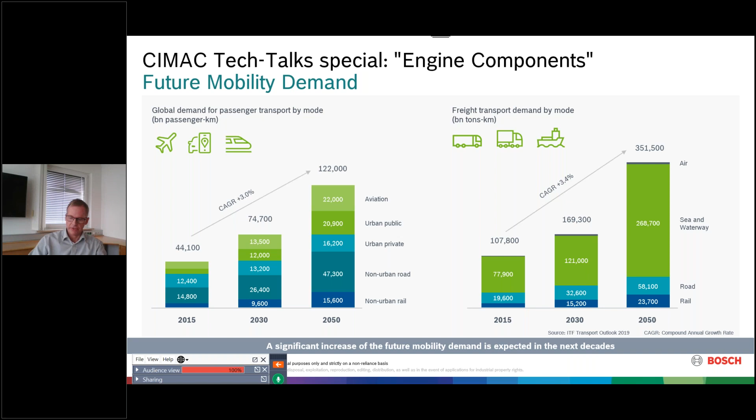Coming now a little bit deeper into the large engine segment, it is in principle separated into 4 subsegments: we have the gensets, the maritime, the locomotives or railways, and mining. On the left side you see in this diagram today's situation, and on the right side the future situation as predicted. The diagram gives an overview about the fuel supply on the y-axis. It could be via a network, via local storage, or via onboard storage if it's a mobile application. And on the x-axis you see the mileage or utilization versus time.

These are important parameters at the end to conclude on the fuel. I will come to that a little bit later.

On the left side, the current situation in blue is that we have the ICE, mainly fired with diesel or derivatives of diesel, and also already natural gas. When it comes to the future on the right side, there is a certain change in the technology, marked in green, new fuels. These fuels are characterized by either an improved ratio between carbon and hydrogen, or even being carbon free, which is the case for NH3 or hydrogen. It could also be standard fuels but from another source, like biofuel, which reduces CO2 already initially, or even e-fuels.

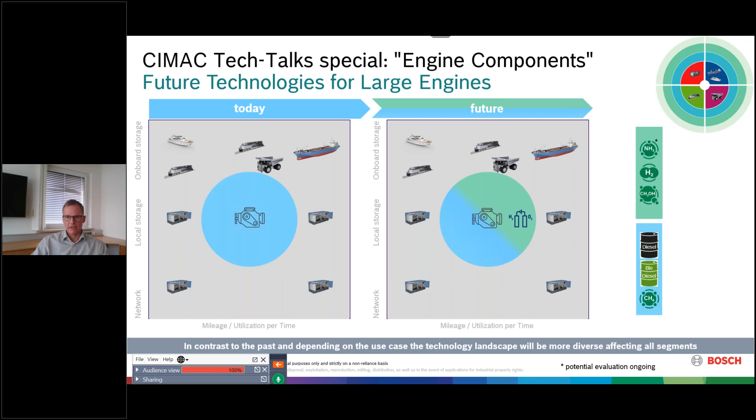So that's in principle the situation when it comes from today towards the future in the large engine segment. And there might be also one or the other application with a fuel cell.

What does this mean for the future landscape of the fuel? As an example, but I think valid also for other subsegments, we are talking about maritime. You see on the right side the sailing pattern versus the sailing distance for several types of ships. That's exactly the topic when it comes to deciding what kind of fuel, from this diversity, will be the right one in the future.

It is not that easy, because the parameters important to decide this include the use case. For example, for ships at sea, there's a huge variation, covering more or less all patterns that are thinkable. This means it's not easy, and I will come to this a little bit later, to decide what kind of fuel is the right one.

Currently, we are talking about diesel fuel mainly, and that's it. But this kind of single solution is no longer possible in the future, and it makes things a little bit challenging. So how does it work towards the future?

You see it on the left side in this column diagram. It shows from 2020 towards 2050 how the fuel types will be developing. 2020 means currently all fuels are derivatives from diesel. By 2030, in this scenario, about 20% are new fuel types, which is e-ammonia, LNG, and certain advanced biofuels. A decade later, in 2040, more than 50% is with the new fuels.

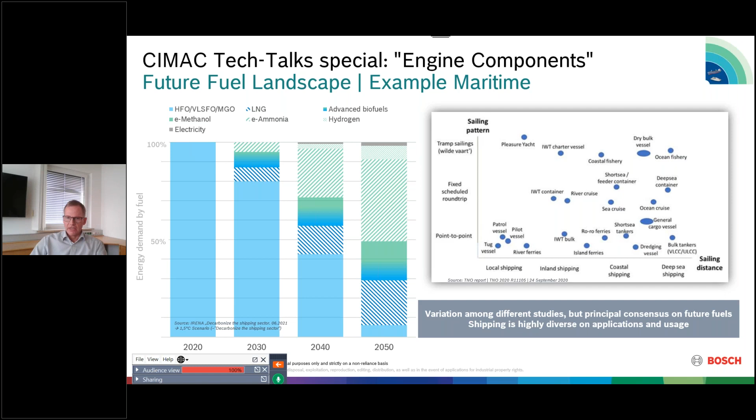This is due to further growth of the aforementioned fuels, as well as supplementation by hydrogen, e-ammonia, and even electricity. In 2050, most of the fuels are already these new alternate fuels, which have less contribution to CO2, and only a very small amount remains diesel.

So what does this mean for the decarbonization path for maritime? The right side shows on the bottom the situation as it is today: we have the ICE with diesel. There is a quick win already with biodiesel and methane, or mostly LNG. Then the next step will be the ICE with new fuels, meaning potentially ammonia, hydrogen, and also methanol.

There might also be one or the other application already with a fuel cell. There are certain limits from today's point of view for fuel cells, especially in the large engine range. One is for the PEM, for example, that there are certain requirements for cleanliness, and the other is that the dynamic response for the SOFC fuel cell is not what is needed in all applications, so there are certain limitations.

But based on this scenario, you see already that it will come, and in principle there are a lot of scenarios available, and the tendency is quite comparable.

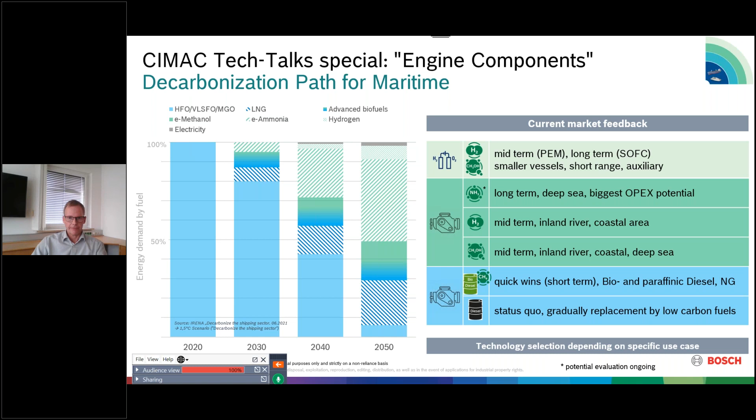So the future is towards the new alternative fuels, but still with the ICE. Coming to the combustion system, you see again in blue on the bottom today's situation. We have the diesel, we have already natural gas. This means we have diffusive combustion, and we have premix combustion.

And when it comes now to these new fuels, what you see here in green, there is a huge variation. It could be liquefied, it could be gas, and this kind of fuels you can burn either premixed or partly also under high pressure. So with that we have then for the PFI pressure levels for the injection system less than 10 bar.

For direct low pressure injection, we are talking about pressure levels which are below 100 bar. And when it comes to the liquefied high pressure injection, we are talking currently about less than 600 bar. So on the right side there is in a qualitative manner shown in principle what is the engineering content and the efforts versus the experience and maturity level.

So it's quite understandable that the current fuels, diesel, natural gas, which is quite comparable to methane, is on the upper right side, which means it is already well known, very high experience, and the optimization is in principle in focus. There's no base work.

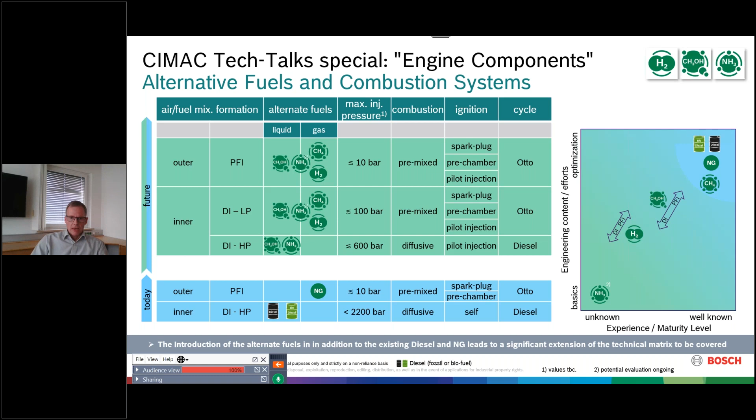But when it comes to the new fuels, we have to do a lot of investigation work on the combustion system, so that we have at the end really defined requirements as we have the situation currently for the diesel engine. This means that for the first samples, the injector is directly in contact with the combustion, and in principle it's one of the important components beside the whole combustion system, the air system, and also the combustion chamber geometry.

It plays under this kind of boundary condition to come here to a conclusion what kind of requirements we have for the new fuels. That we need here on the one side a robust solution already at the very beginning, that we have in principle the possibility to have a very good testing condition and reproducibility. And from the functionality point of view, it should also be the situation that these kind of injector samples have the potential to investigate all the parameters which are important, from the pressure, of course, also to the injection pattern.

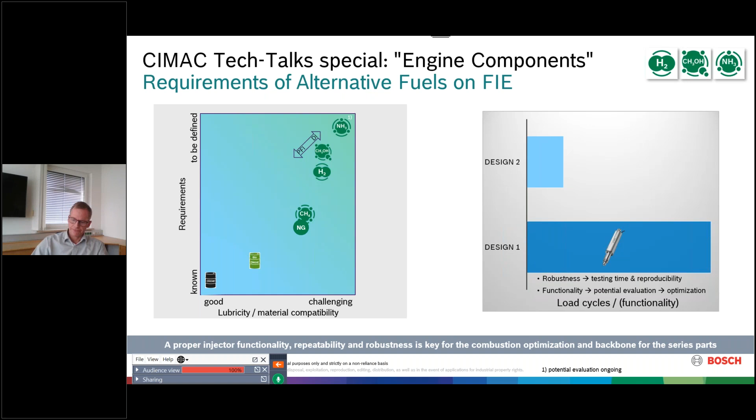Coming now to the injection system itself, we currently support all kinds of fuels: ammonia, which could be gaseous or liquid; methanol, which is liquid; hydrogen, which is gaseous; and methane, which is gaseous. As I explained before, we can use premixed combustion with port fuel injection, or direct injection, either low pressure or reaching up to high pressure injection for liquefied fuels.

From the product point of view, in our portfolio for port fuel injection of gaseous fuel we already have the large engine gas valve, which is series ready and starting production for natural gas. We are currently qualifying it for new fuels, either hydrogen or ammonia.

For the next step, direct injection at a low pressure level—less than 100 bar, as I showed before—we have our new injector, the AFI LP, the alternative fuel injector low pressure. This is a modular design able to inject liquefied fuel like methanol, but also hydrogen, a gaseous fuel, and it's also foreseen to inject NH3, ammonia, either liquefied or gaseous. That's one of the important components for the future, and I'll show more details in a few minutes.

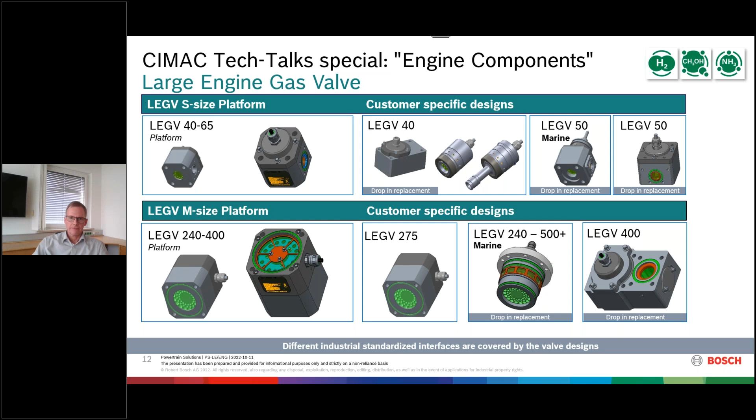Coming to the AFI modular concept, this modularity is based on experience not only from large engines but also from our automotive injection systems, where we concluded together with our colleagues what is the best design for these new fuels. As seen before, gaseous or liquefied—we're no longer talking about high pressure of 1000 to 1200 bar, it's less pressure, but the challenge with the new fuels is more in the direction of lubrication and the aggressiveness against the surfaces.

This injector is in principle an injector with a direct needle drive, a solenoid injector, with an outer open needle, ready for an injection range from 10 to about 100 bar. We're able to cover, depending on engine type, from 150 kilowatt up to around 600 kilowatt with this injector type. We've already run a highly accelerated lifetime test of about 500 hours, with overwhelming results both from the functional point of view and the robustness and wear behavior. We now have the second sample step ready by the end of this year, and customer samples will be available beginning of next year.

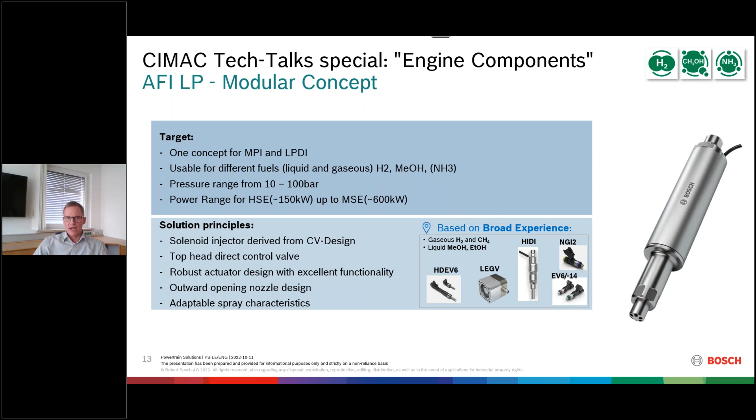The other one is the AFI high pressure. This is for diffusion combustion, for methanol, or potentially the NH3 liquefied phase. It's able to inject up to 600 bar. The base is in principle our so-called MCRS for large engines, but here we separate the control area and the control fluid from the injected fluid.

These fluids are quite aggressive, so it makes sense to have separation here to ensure high lifetime and robustness. We have the situation that we can inject up to 600 bar, maybe a little higher, depending on requirements from the engine, which come from initial investigations. We are able to cover 150 kilowatt per cylinder up to 600 kilowatt per cylinder with this injector type.

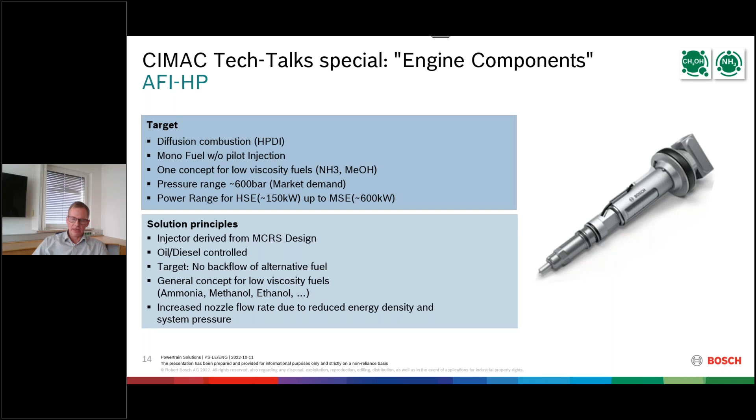As I mentioned before, this is already available as a concept. We are doing the final design now for next year, and most probably the samples for the customer are foreseen at the end of next year.

Let me shortly summarize the current situation. In principle, the technical solutions for decarbonization of the large engine segments are defined. We are talking about new fuels. The first step is an introduction of bio and paraffinic fuels, as well as biomethane. This is the so-called quick win.

What I didn't mention before, we also ensure that our standard FIE for diesel is ready by the beginning of next year for the use of biodiesel, which mainly means validation. For these validations, we have a specification, which means B20 and B30. Based on our initial investigation, it's pretty clear that it is possible to use that, so we have a solution for the first step.

Equivalents as well. Then the next step is hydrogen, methanol, and potentially ammonia. Ammonia, from our point of view, still raises a question about laughing gases, which needs to be addressed and where we need a solution. But we do foresee it in our portfolio, as we have seen before.

What is very clear from the initial investigation and even the theory behind it, we need not only a sophisticated injection system for this new fuel, but also an optimized combustion system, which is important to achieve the same performance and emission limits as currently with diesel engines. From Bosch's point of view, our portfolio supports the complete decarbonization technologies with smart solutions and robust design, which ensures the investigations can be done in a very efficient manner.

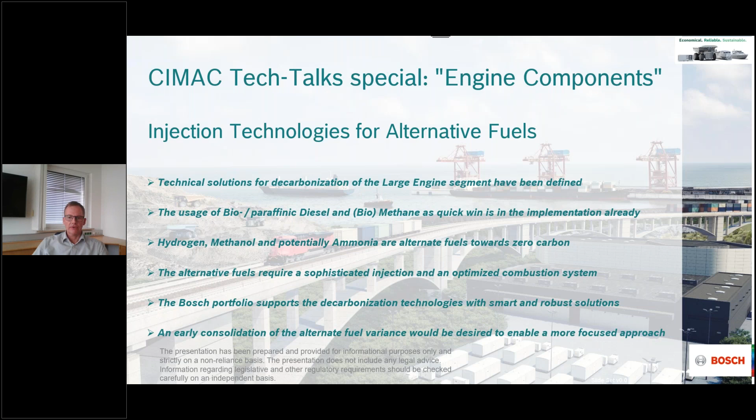So from that point of view, I would like to thank you very much for your attention, and I'm open for questions.

Thank you, Mr. Stein, for a very interesting presentation, which laid out already much of the groundwork and issues that any fuel injection equipment maker has to deal with for new fuels. This work we present today was done in cooperation with LEC, and I would like to acknowledge also my co-author, Nicole Wermuth. This is about trying to test injection technology in every possible way with methanol and ammonia, to build knowledge and move, in the graph we saw in the previous presentation, toward the known and reliable areas of the diagram compared to the yet-to-discover ones where we all started with these new fuels.

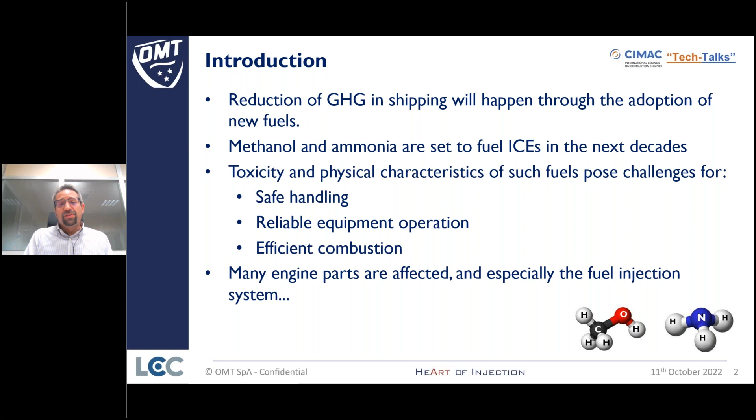So today's issue is about how to design an injector for these new fuels. There are additional requirements that these new fuels pose on the development of fuel systems: we need to ensure safe handling, reliable equipment operation, and we also have to discover again how to achieve efficient combustion of these fuels. Of all the systems, the fuel injection system is the most affected by this change of fuel.

For example, we have an increased need for safety measures due to toxicity, but also a higher risk of cavitation, seizure, and corrosion. On top of that, we have to deal with the low heating value of the fuel, which is less than half of diesel on a mass basis. So we need to make the injectors bigger, with more passage area to avoid significant pressure drops in the equipment - all in a challenging location, the head, where space is normally already insufficient for injection equipment.

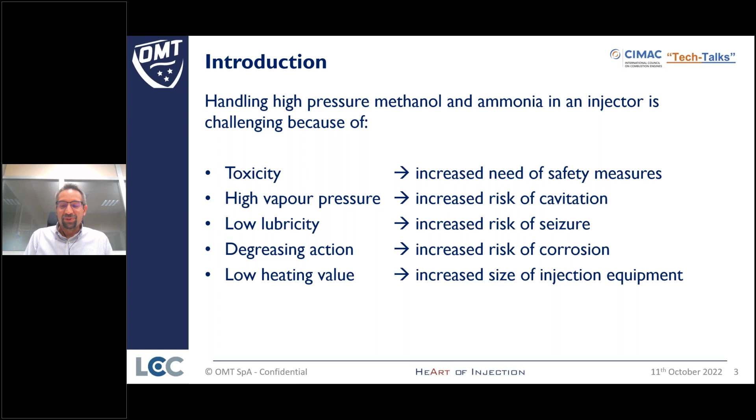So we asked ourselves: how do we design a high pressure injector capable of reliably injecting methanol and ammonia, and what performance can we expect from combustion of such fuels in a combustion engine? Finally, how do we optimize combustion of these fuels? These were the main questions we wanted to answer within this project, done in partnership with LEC and also AVL, which are acknowledged here.

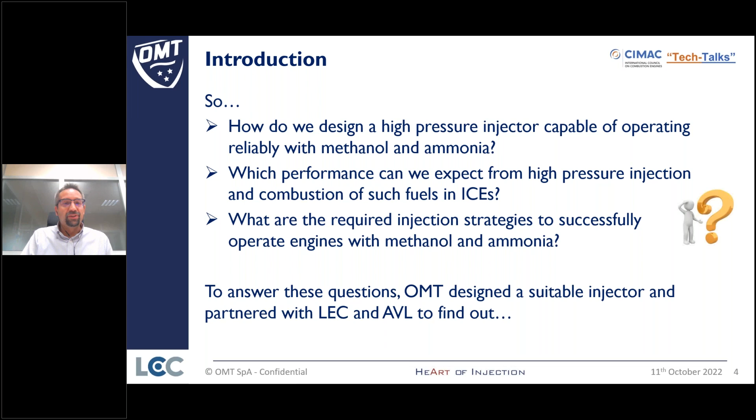Now, looking at some features of the injector design: of course, stainless steel, which we deem necessary to make sure we don't have issues with corrosion, or at least to limit those issues.

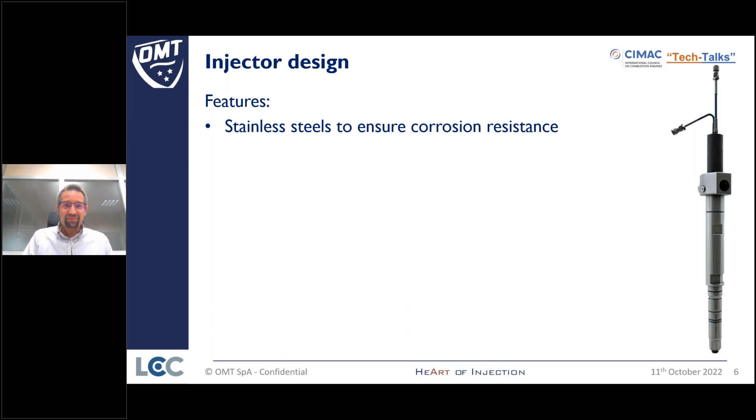We need hard metals for the control valve seats and fuel back pressure to reduce the risk of cavitation erosion. To give you an idea, in this area highlighted here, where the control valve seat is located, discharging fuel from rail pressure to tank - without back pressure and without hard metals, after a few hours the only piece of seat remaining is this triangle at the bottom; all the rest is completely eaten away by methanol. Conversely, applying 10 bar back pressure and hard metals, in the same time frame we could achieve still more or less perfect conditions of the seat.

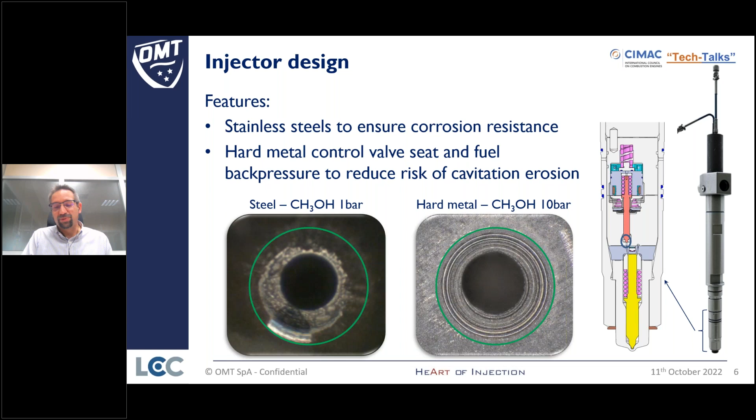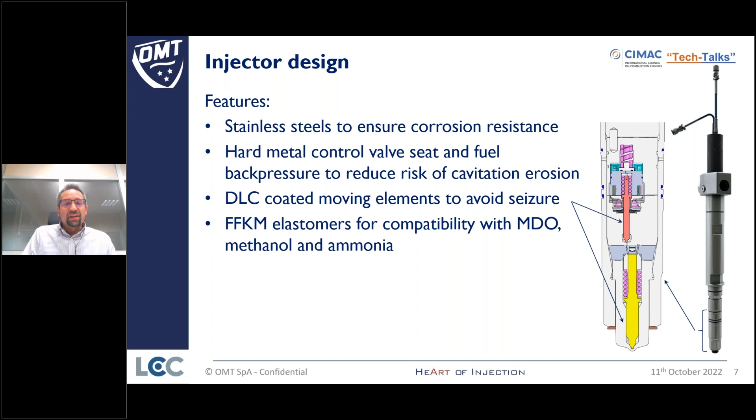So there is a lot to play with in terms of materials and injector requirements to ensure reliability, which is one of the main issues when changing to these fuels. Further, to avoid seizures, moving elements running in low lubricity fuels need a coating that reduces the friction coefficient and prevents seizure, like DLC, which we apply to all the needles and pistons here. Also for sealing elastomeric elements, especially when testing different fuels in the same injector, the only compound that really works for everything is FFKM, even though it's rather expensive - otherwise you cannot get compatibility with everything we wanted to test here.

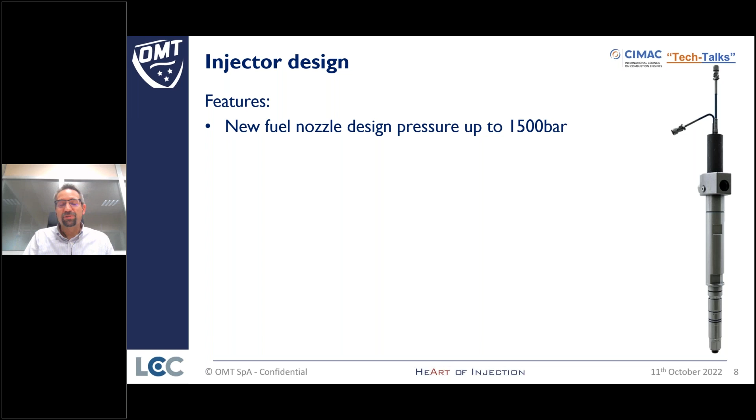Regarding the hydraulic characteristics of this injector, we wanted to push the capability up to 1500 bar to explore a wide range of operating pressures. Even though the market seems to suggest that 600 bar could be enough, we wanted to make sure, as part of this project, to also explain why we don't recommend going higher.

We also identified different spray hole sizes to find the optimal trade-off between low rail pressure, which gives you a longer component lifetime, less wear, lower cost, and lower pump power consumption, and increasing rail pressure, which normally in diesel operation gives finer atomization and a benefit on combustion, and a smaller size is achievable. But we have to see what the trade-off is here for these new fuels compared to diesel.

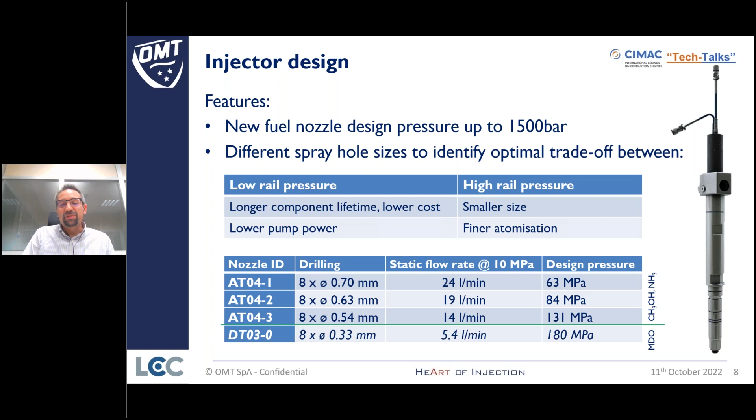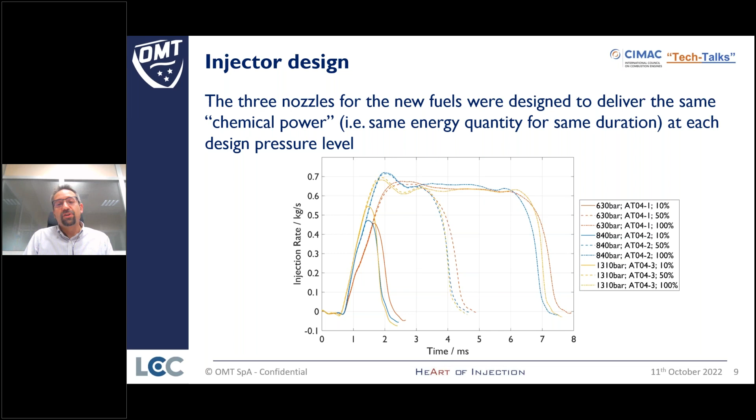So this was the framework for the hardware that we wanted to test on the engine. We designed these different nozzles so that the injection rate shape at 3 different rail pressure levels would yield the same injection rate trace. This was to be able to study just the effect of spray formation and decouple it from the injection rate characteristics of the injector—same injection rate, meaning opening and closing slopes, and the same injection duration.

So now, characterizing this injector on the test rig, we also wanted to check the stability to lubricity, so we ran the injector for quite some time with water with a little bit of ethylene glycol solution. We also measured performance, and we could see that the performance in terms of injection rate is different for the 2 fuels.

But this is mainly due to the difference in density. If we correct for density, we obtain basically the same injection rate characteristics, which means we can also develop an injector using the standard calibration fluid like we did for diesel for many years, and we could get the right response in terms of dynamics. This is the same with the 2 fuels. It was not given for granted before, and it was verified in this example.

Having identified these characteristics and well defined, we then moved on to characterize the spray of the methanol, in the slides I will show you, and compare it with the diesel spray obtained by the same injector, just changing the nozzle characteristics.

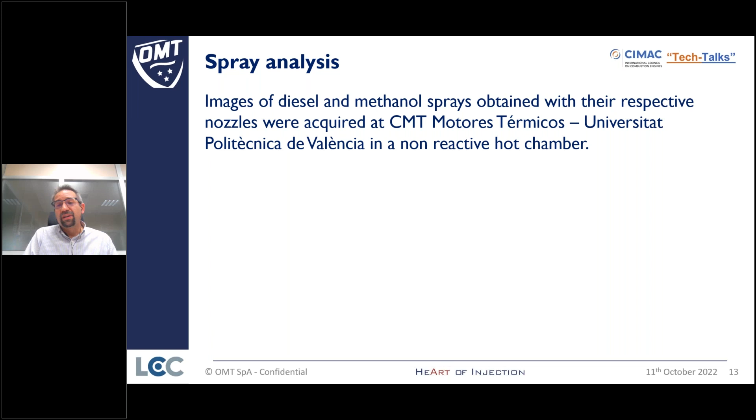We did this with the help of our friends at CMT in Valencia, in a non-reactive hot chamber, meaning there was no combustion, but the gases were heated to the level of end of compression when injection should begin. Two setups were used to measure the vapor spray penetration: a Schlieren setup, basically looking at the shadow and variation in density fluctuations on the shadow of this laser source, and also direct illumination of the spray with Mie scattering to measure the evolution of the liquid spray.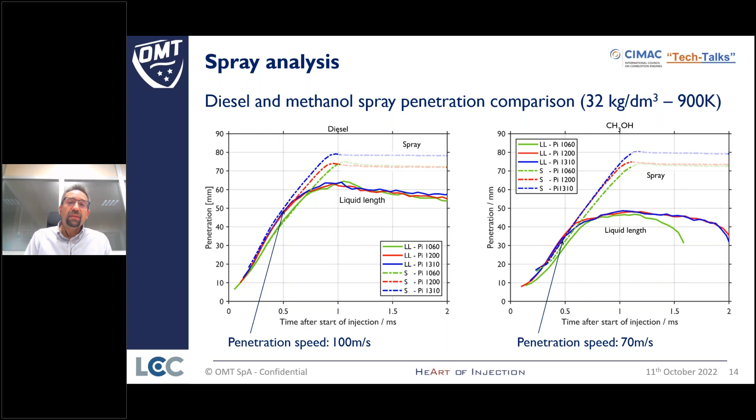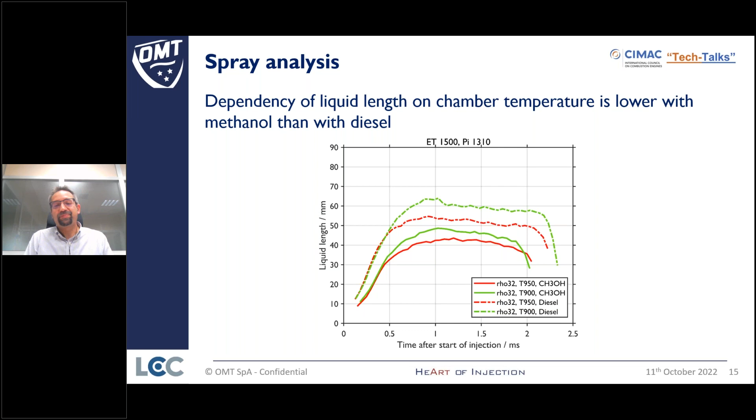After all this preliminary characterization and basic design validation, we went on the engine to try to find out how this stuff really burns and how we can make it burn in the best way. We did this at LEC on a 250 millimeter bore single cylinder engine at 750 RPM, with a 17:1 compression ratio.

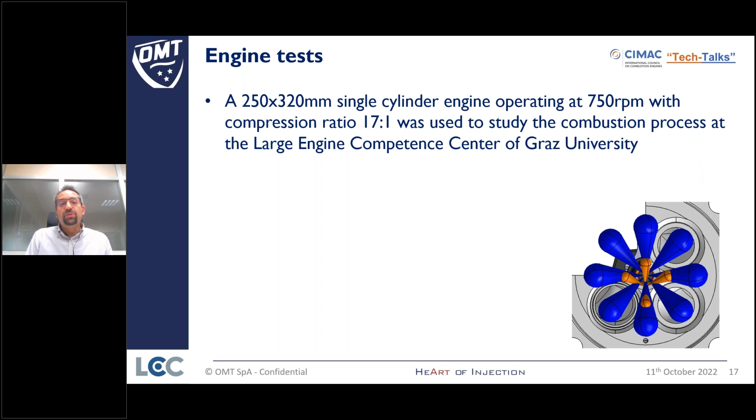Here we used the injector from OMT for two reasons. First, we fitted the diesel nozzle and used this for making a baseline performance measurement. We also used this same injector, which has the capability of operating as a pilot injector, to ignite port-admitted fuel, in this case gaseous ammonia, and I'll show some results later.

Finally, most of the investigation was done with nozzles suitable for new fuels and direct injection of methanol and ammonia. In this case we used a second small pilot injector on the side of the main one, and you can see in the picture on the right how the two spray plumes interacted.

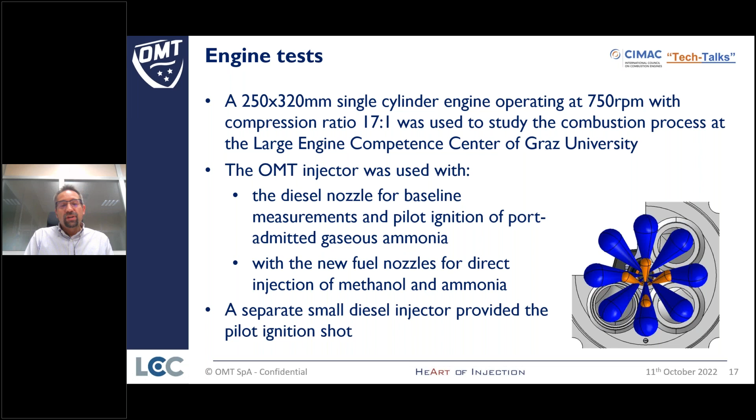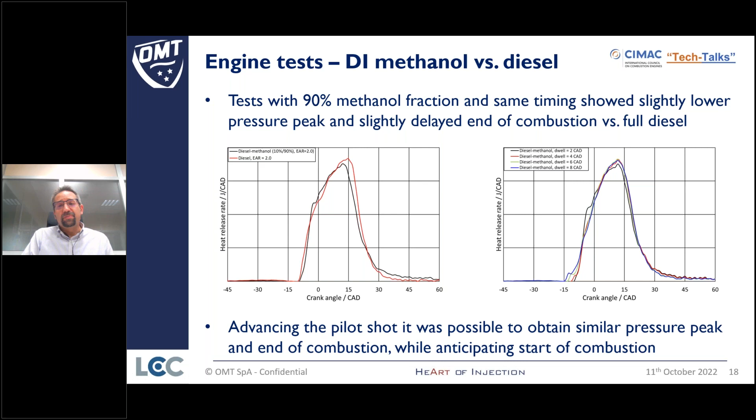This is rather qualitative, but for quantitative results we can look at a comparison of direct injection of methanol versus diesel with the same center of combustion at 10 degrees after center and an excess air ratio of 2. We also performed a variation of dwell time, which is the difference in time between the start of the pilot injection and the start of the main injection, and got these results in terms of trade-off.

We compared them with the baseline, shown as the green dot, obtained with diesel at 160 megapascals of injection pressure. Here we have the equivalent operating points of the engine for 64 and 84 megapascals with methanol, respectively, and the arrows indicate the increase of dwell time, basically the anticipation of the pilot shot compared to the main methanol injection.

An interesting finding from this investigation is that around 640 bar, we get a better trade-off both in terms of fuel consumption and NOx emissions, and the sensitivity to dwell time is not so big.

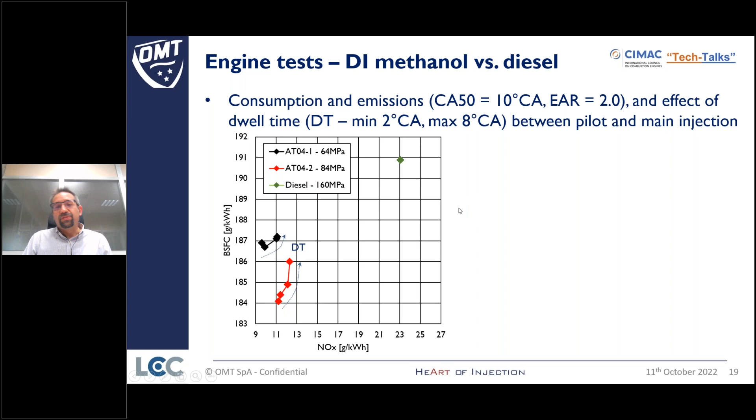Looking at the dark side of these first tests, we have worse hydrocarbon emissions compared to the diesel baseline, which means we most probably need to increase the excess air ratio and possibly look at a different nozzle spray configuration. I mentioned earlier that we have a wider diffusion angle of the spray, so the hypothesis is that we have areas of overlapping sprays causing areas of incomplete combustion.

That's the starting point for further tests we'll do to get to the bottom of it. But we can see the potential not just for burning fuels that promote reduction of greenhouse gas emissions, but also for optimization of the engine as a whole.

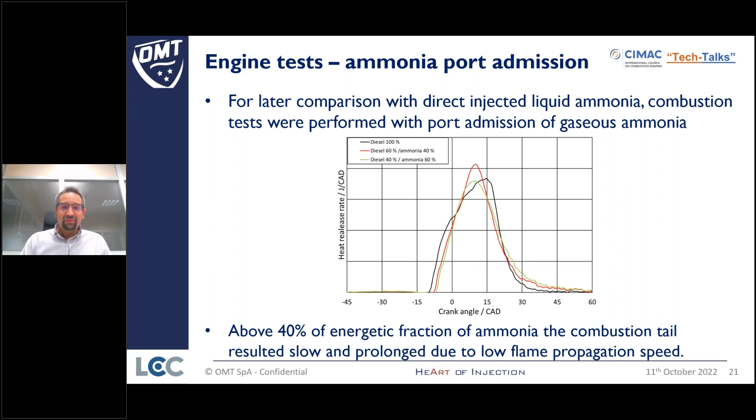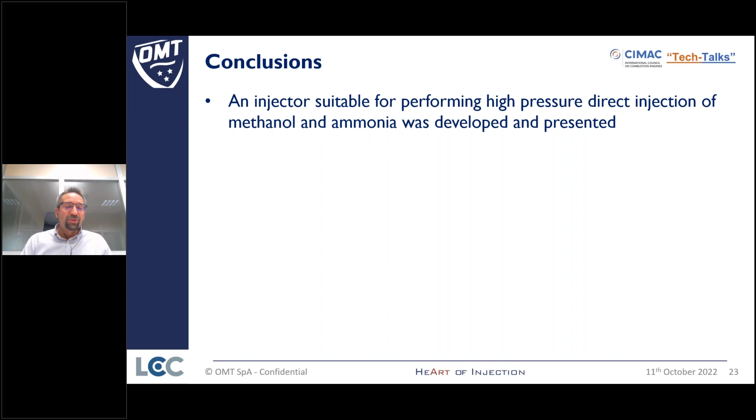So just some conclusions of this in-progress work. We designed an injector suitable for testing the pros and cons and pitfalls of operating with these new fuels, and understanding where the critical points are.

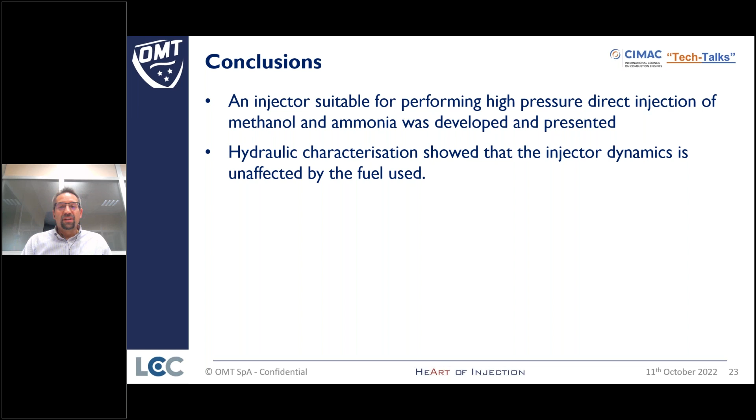We showed that we can characterize the injector also using calibration fuel for performance optimization. Spray analysis gave us some interesting insights, like with methanol we have a shorter liquid spray length due to faster evaporation, and also a wider vapor spray angle and lower penetration speed.

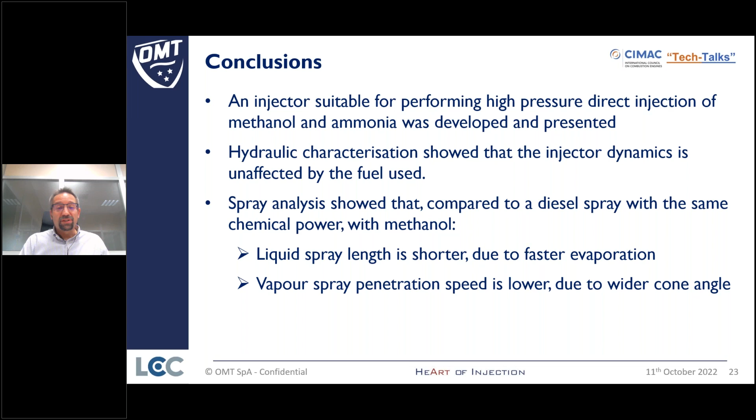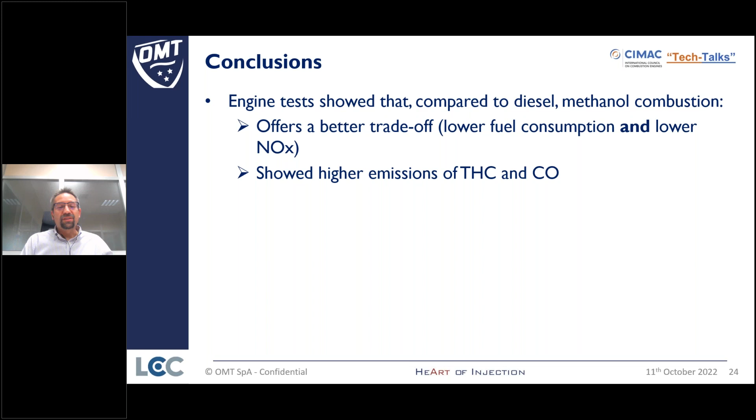On the engine, it seems like we can get a better overall trade-off, in terms of both fuel consumption and NOx, compared to diesel. At the moment we had higher hydrocarbon emissions that we need to work on to complete the picture and give a reliable overall comparison of the two fuels operating on the same engine.

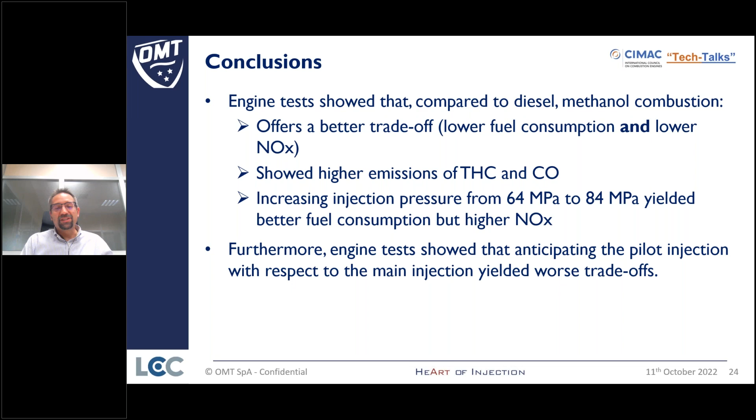Another takeaway from this first test is that there doesn't seem to be much advantage in going high in pressure with methanol, let's say above 600 and something bar. We also found that injecting pilot and main more or less at the same time probably gives the best trade-off that we could find at the moment.

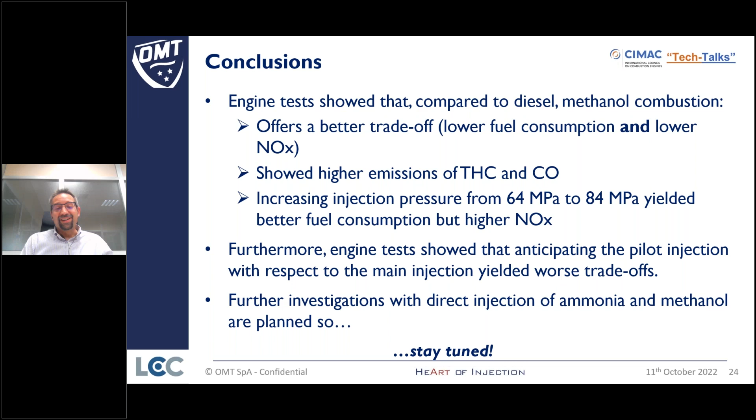As I said, this work is still in progress, so stay tuned, and I hope to see you all, and more, in Busan next year. Thanks very much.

Good afternoon again from my side. My name is Gunther Hager. I'm working for Miba now for around 12 years, but I also have a background with AVL. This work, the crank train development of the AVL high-speed large engine platform, has been supported by AVL, especially Mr. Rustler, Mr. Flesch, and Mr. Estebanes.

First of all, to the content: I will introduce the motivation of this project, give an introduction of the whole large engine platform, talk about the lead-free portfolio from Miba, and introduce our big end bearing monitoring system.

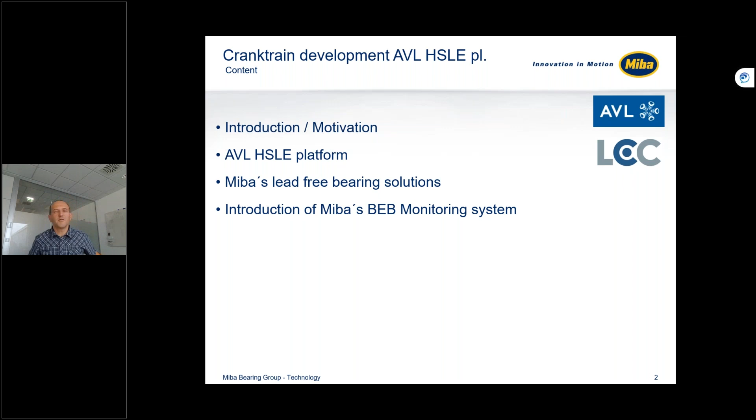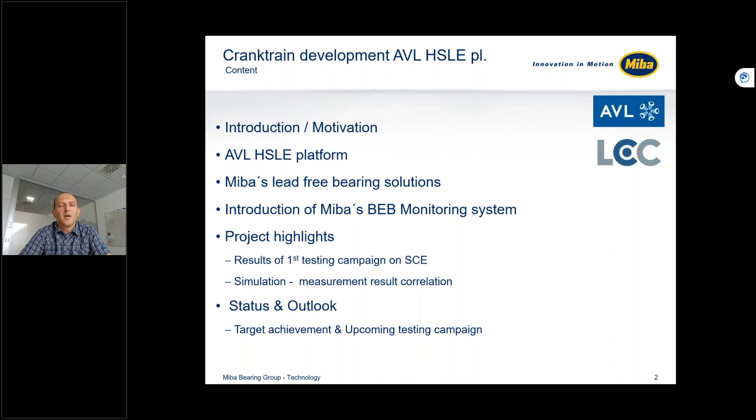There will be some intermediate project highlights. We are talking about the results of the first testing campaign on a single cylinder engine, and also some verification and validation between measurement and correlation to the single cylinder engine results. And of course, at the end, there will be a status outlook, target achievement, and what is coming next in the testing campaign in Q4 2022.

What is the specific motivation? The ICE will also in the future play a major role for transport and power supply. And of course, reliability is a major point, and this will not change despite alternate fuels popping up, as already explained by the lectures before.

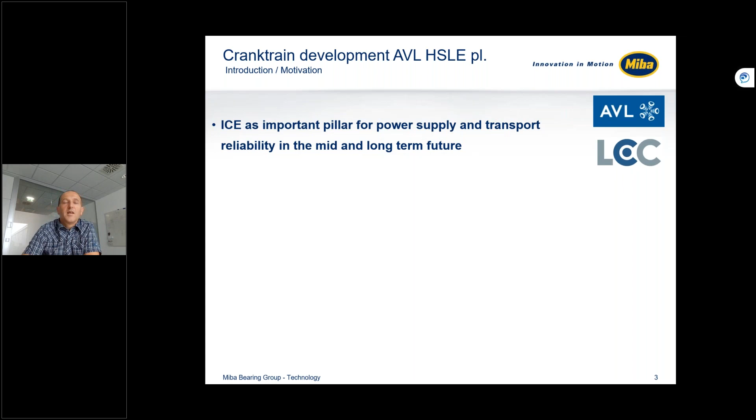Therefore, it makes much sense to further develop the ICE, but not only the thermodynamics, but also looking at the whole crank train, looking at maximum efficiency, but also the compatibility to renewable fuels is important. And we also have to look at the regulations—on the one hand emissions, but also materials that are used within the engines.

We are talking here about thermal efficiency and reduction of friction power losses. Of course, we need a robust powertrain in combination with new bearing solutions, especially when we talk about hazardous materials as lead.

Of course, we are looking at enhanced simulation methods to have a first-time-right approach, and also to improve development efficiency. What is also key for the future is to have a reliable monitoring system for verification, but also for health monitoring.

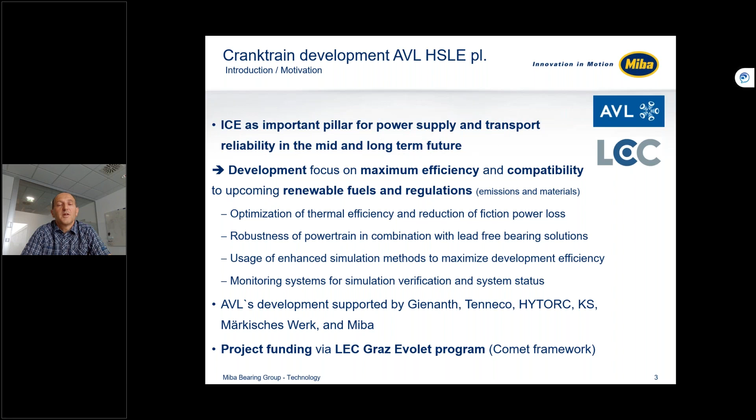This project was not done by AVL and Miba alone. There were several supporters and project partners, named here as Tenneco, Kolbenschmidt, Märkisches Werk. The project was funded by the COMET framework, and the single cylinder engine tests were done on the Large Engine Competence Center within the Evolet program.

Let's come to the basic AVL large engine platform. We are talking here about a 175 millimeter bore engine with a stroke of 215 millimeter. We see some rendered pictures here of the single cylinder setup. The engine speed is typical for this engine size, between 1500 and 1800 RPM.

One major goal was to achieve a peak firing pressure around or above 330 bar, meaning a brake mean effective pressure of 35 bar. The specific fuel consumption should be below 165 gram per kilowatt hour, and it was a target to gain an efficiency of above or around 51% in the gas mode. Of course, minimized lube oil consumption is a must with these boundary conditions.

Several combustion concepts were tested, or will be tested: diesel direct injection, active pre-chamber spark ignition concept, passive pre-chamber spark ignition with gas, direct injection with hydrogen, and port injection with hydrogen.

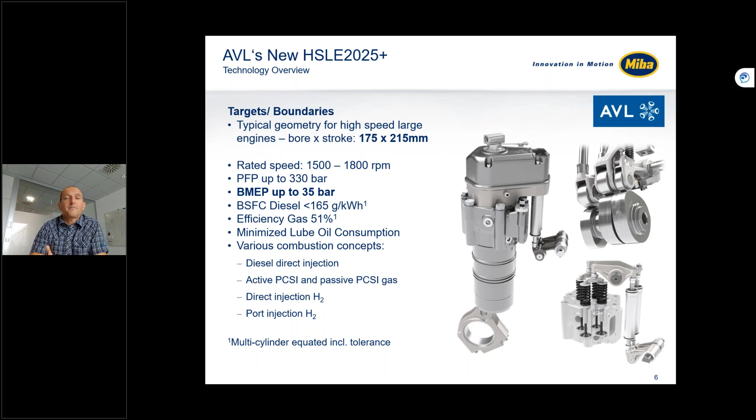Coming to the technological overview, more from a mechanical point of view, there has been a new patented cylinder head cooling and strength optimization concept, and a patented crankcase cooling. Of course, all these features have been simulated using CFD, multi-body dynamics, as well as finite element analysis.

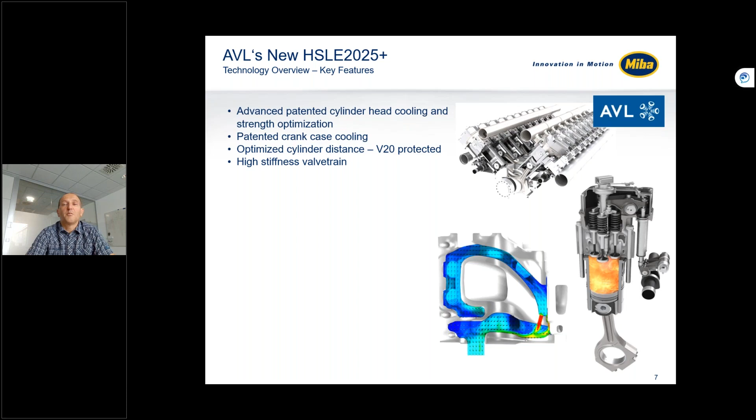The cylinder distance has been optimized, and this concept is not only done for the single cylinder—in the background there is already a V20 concept based on the single cylinder setup. In addition, the valve train has been optimized for maximum stiffness, and one major key feature on the whole engine was to optimize especially the conrod small end to avoid the need of active lubrication, also for manufacturing reasons.

Let's switch over from the AVL large engine platform to Miba's future bearing portfolio. You see here the copper-based lead-free portfolio. Let me do the laser pointing. Here you see the portfolio on the one hand of the half shells as well as on the bushing side.

So we will have in the future a Synthec and especially two sputter options on a lead-free basis. Beside that as an option, there will also be an electroplated version, and we will have for the small end also a lead-free version, a pure bimetal as well as an electroplated coating bearing. These three bearing types have already been tested on the single cylinder engine, and I will show some results in a minute. All in all, Miba will provide a consistent lead-free portfolio within end of 2022, to be ready for production and serial deliveries.

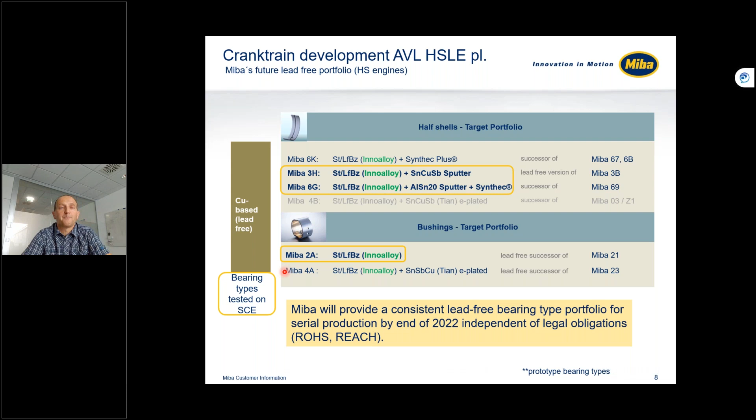What is the lead-free solution all about? We see here a short overview of the pros and cons of the different base materials. On the one hand here we see the characteristic of the standard leaded bronze, with quite good tribological aspects, and also the castability and machinability is very good.

We had in the past an intermediate solution of the lead-free—we call it here Gen 1—but these had some basic disadvantages, especially from the machining, but also from the robustness and tribology.

The next step, and this is the actual development that's also been tested as said before, this is the Gen 2, where some sulfur content is within the bronze that especially improves dramatically the machining capabilities, but also—and this is important for the robustness of the whole engine—has major improvements on the robustness.

There have been tests also on our rigs, and you see here a standard seizure load test program and the results. We see here again the three bearing types, the basic bearing type. So we are talking here about a bimetal bearing without the coating.

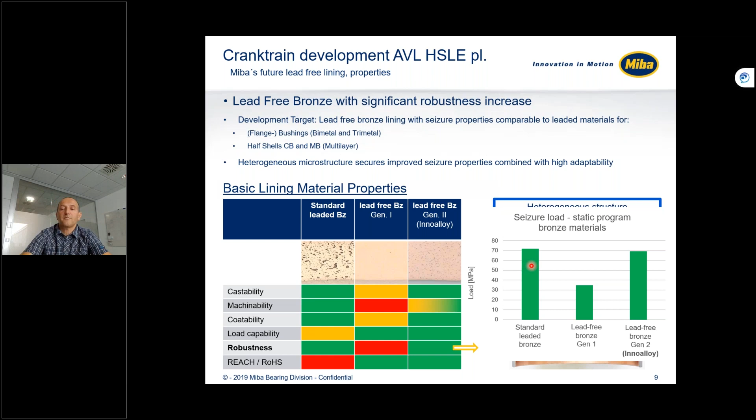Coming to the second feature introduced in this engine: the monitoring system for the big end bearing. We see here the connecting rod of the single cylinder engine, and here we have a telemetric unit mounted on the lower part of the connecting rod.

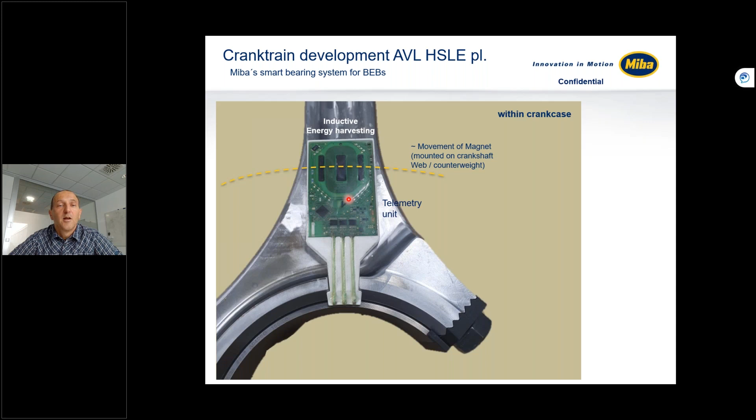This is not driven by a battery, but with an inductive system, and with the mounting of a magnet on the crankshaft, or let's say the web or counterweight depending on the design, we get enough power to reliably drive the system.

To get the temperature result very close to the bearing, we machine the bearings on the side and drill some holes to get temperature information down to 50 millimeters to the middle, only needing a small slot on the side face of the connecting rod to get access to the measurement position. All other machining is original, without any additional changes.

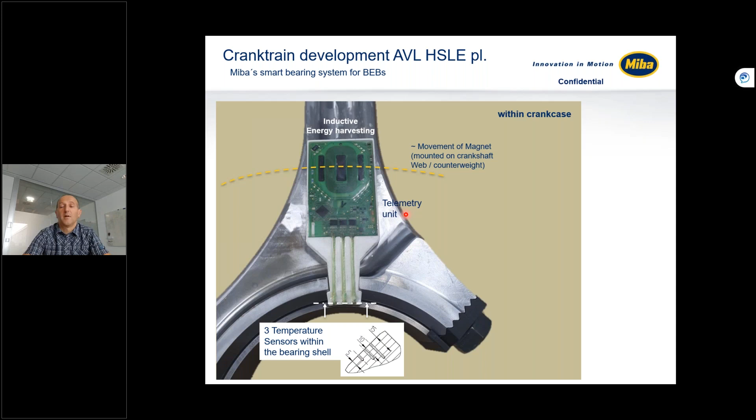With this system and the energy generated, we have a receiver unit mounted somewhere on the crankcase, and with this receiver unit we have a connection to the engine control and application monitoring.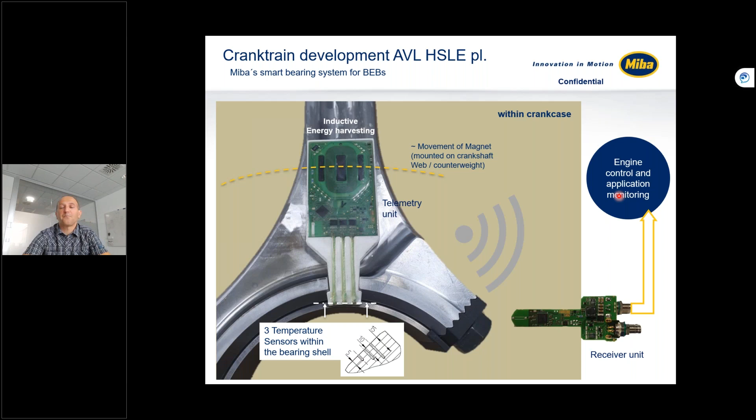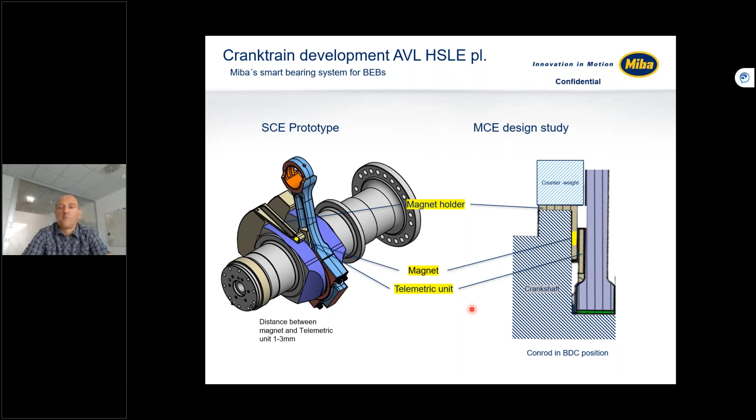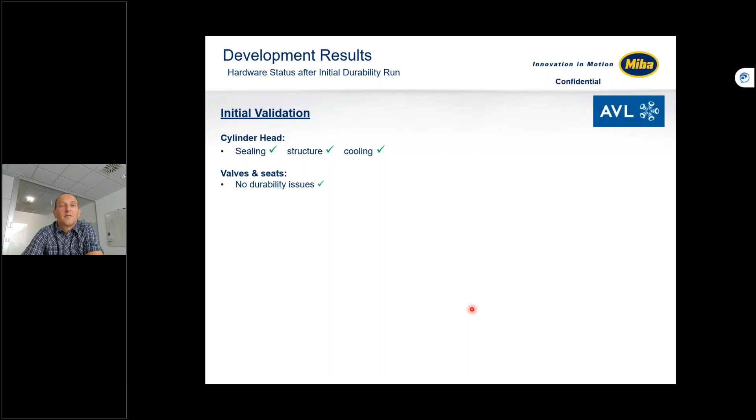Coming to the initial validation of the single cylinder engine: from the cylinder head and the valve seats, the structure and cooling, everything was working perfectly. There were no issues on the whole system. Everything was working well, so no need for any changes.

Also for the big end bearing, the running pattern after the first 100 hours looked perfect. This is only discoloration from the tin-antimony bearing used for the first break-in of the engine, and this is a very uniform running pattern without any major issues.

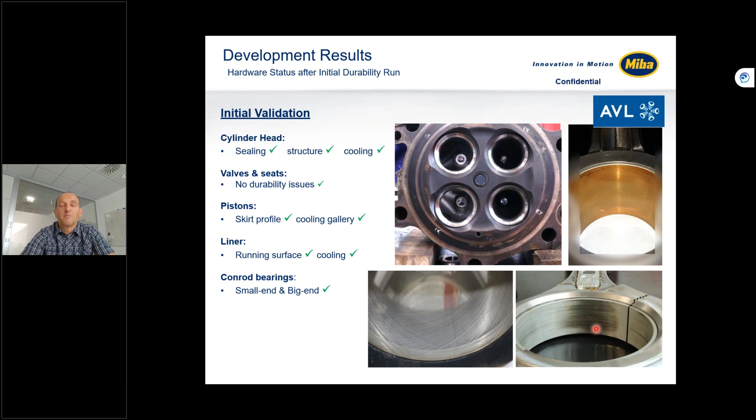How has this been achieved, especially through the use of CAE on the single cylinder design, the virtual development? The whole layout has been done as also described in the introduction, for a system unit capable of achieving a peak firing pressure of 330 bar.

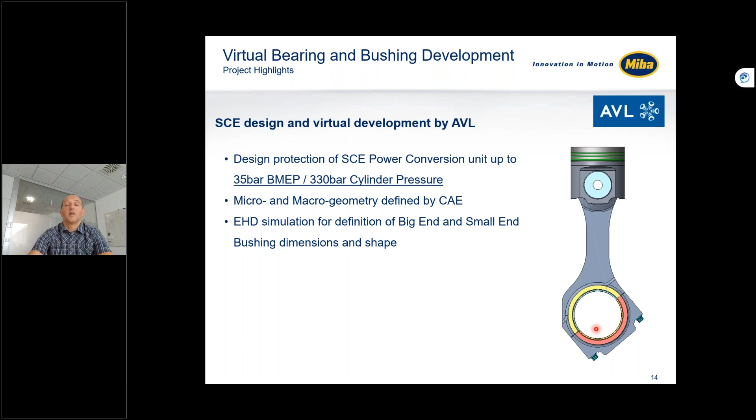The micro and macro geometry has been defined using all the CAE methods, being AVL Excite, post-processing and further processing with finite element models. EHD has been done for both the big end and the small end to define the bushing dimensions and the shape.

Based on that, there was a clear proposal for the machining according to the CAE methods, and therefore we did not see any specific break-in wear during the engine runs as shown in the slide before.

What also was tested and worked perfectly on the small end bushing: no direct feed of pressurized oil supply was used, so there is no feed bore between the big end and the small end. The small end works similarly to what is known from smaller engines, such as truck size.

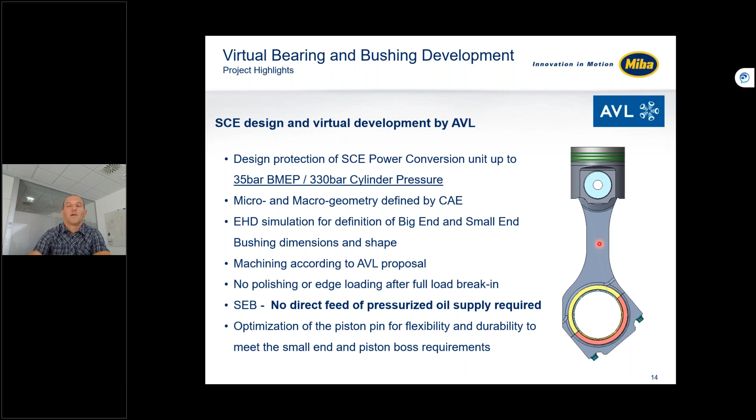Now to some detailed results from the engineering. On the left side here is the design of the small end bushing, and we see the distribution of the maximum pressure in megapascals, as well as the asperity contact, in this case for maximum power output at 1,800 RPM.

Beside the total pressure, the asperity contact pressure is also depicted. It's not so easy to see, but there was some initial edge loading. This edge loading can be corrected by a virtual running-in procedure, which gives the final shape of the inner surface contour of the bushing, and as shown before, the result fits perfectly.

So this shape correction required no specific polishing on this bearing type, a lead-free bushing provided by Miba, without any coating to be mentioned here - so it's a pure steel lead-free bushing solution.

On the big end, same thing - this is pretty standard, an EHD simulation has been done, where we see the total pressure distribution in this picture, and only very minor asperity contact pressure. So the design was optimized so that the asperity contact pressure can be minimized, and no other corrections were needed. So as Miba, we could use a standard bearing layout.

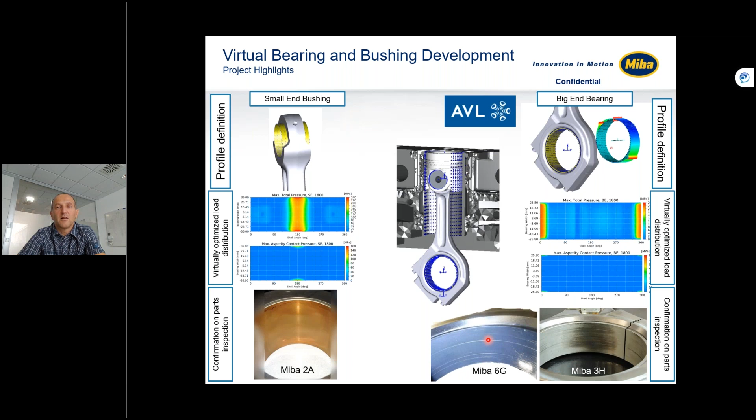This is the aluminum tin 20 sputter with a synthetic overlay, seen here in black. Basically the appearance was pretty perfect. We see here some scratches from small particles that go through the synthetic layer, and therefore we see the gray shiny aluminum tin 20 sputter underneath. But besides that, the running pattern was perfect and no issues were detected after disassembly.

So after break-in, the bearing works perfectly in hydrodynamic mode. There is a perfect stabilization of the temperature, and as expected, if this is the case, the load has only a minor impact on the temperature.

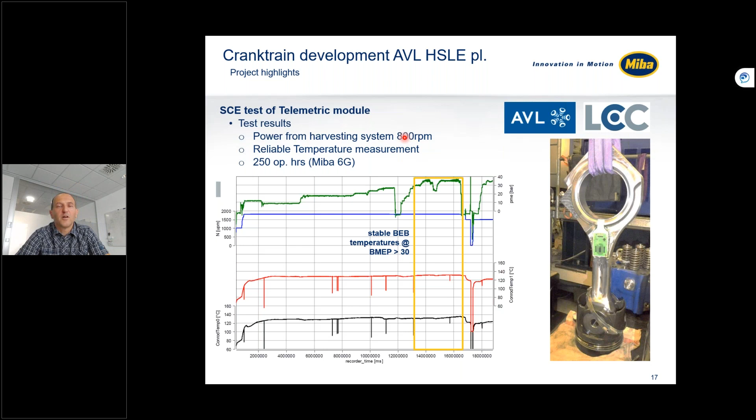Coming to the outlook and the status - all the intermediate target results have been achieved. The brake mean effective pressure and the peak firing pressure in diesel and gas mode have been achieved. The mechanical development didn't show any signs of weakness, be it the liner, the piston, the cylinder head, or the power unit with the connecting rod and the big end and small end on the connecting rod. So from this point, there are no issues to further progress with the project.

There is a testing campaign planned or already in progress - maybe Michael can tell us news about that in Q4 2022. There will be some heavily instrumented components that have not been used until now, especially on the piston, the liner, and the cylinder head, the seat and seat rings. So there will be much more measurement data available after the end of the testing campaign.

There will be some additional testing on the big end bearing system for robustness reasons. As it has been designed, there is a separate supply line for the big end bearing, and there will be some robustness tests with variations of the feed pressure and the oil flow volume. This is of course only possible with a monitoring system, to not risk any engine damage.

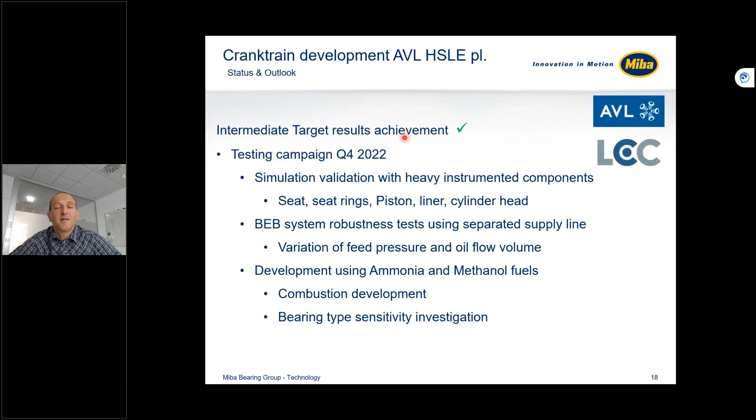And of course, last but not least, a very important topic: developments from the combustion side using alternative fuels. That means especially ammonia and methanol will be used. I think I didn't mention in the presentation, also hydrogen injection will be tested. There will be combustion development on these fuels, and what is very important as well, especially in the interaction between the bearing and the lubricant, some sensitivity investigations will be done.

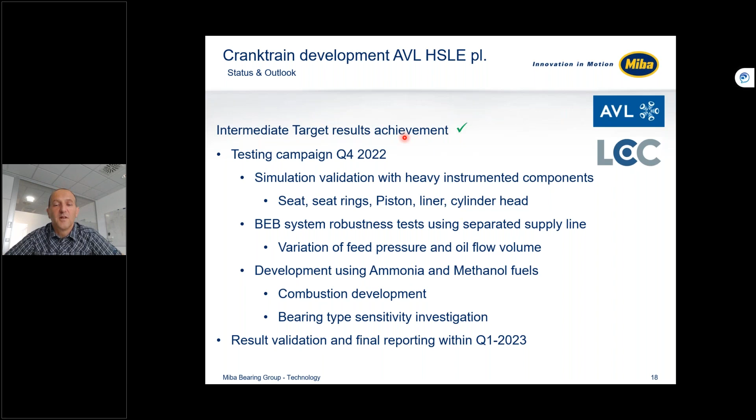And last but not least, result validation and the final reporting will be internally available within the first quarter of 2023. So I'm at the end of my presentation and waiting for questions.

Gunther, thank you so much for giving us an insight of the development phase of this high-speed engine platform. I'm looking at the board, I cannot see any questions so far. Let me address one question.

You talked about the bearing temperature measurement with the telemetry system, and of course it makes sense with this high speed, high load engine up to more than 30 bar BMEP. Can you think of other applications where it would make sense besides research and development, such a monitoring system?

Basically we didn't design the system only for development. As we are a supplier of parts, we think that midterm it could also be possible to use such a system for serial application. Of course the development is also not finished yet. We only did five different tests with different customers, not only on the AVL engine, but also with some other customers. There are still some smaller obstacles, but generally it could be used for serial application. We also scaled it down, so generally it's usable down to a truck engine size - this is the limit for this system. Our major target is this engine segment, at the bore between 160 and let's say 250 millimeters.